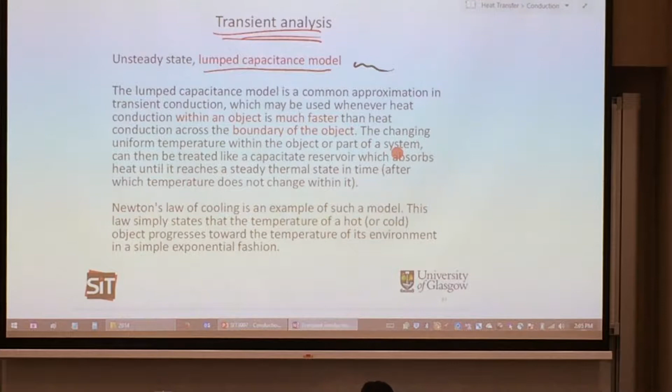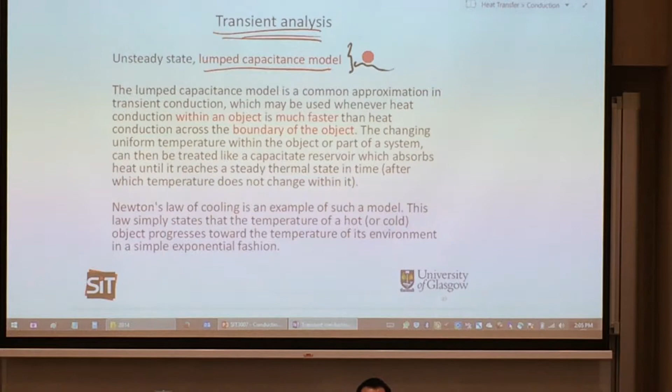So let's get started. We're interested to look at transient conduction because we're after this thing called the lumped capacitance model. So what you have heard so far seems to be a block of material with a temperature difference, and due to that temperature difference, heat will get transferred from one surface to the other surface. That's what you have been hearing.

And I extended that to the cylindrical form, and even for the cylindrical form, you have two surfaces of that pipe - the inner surface and the outer surface. Whenever there's a temperature difference between these two surfaces, heat will get transferred, and heat transfers from hot to cold side. But what I haven't mentioned is how much time it will take for that heat to get transferred over. It's almost assumed that as long as there's a temperature difference, heat gets transferred. But what about the time taken?

So this is why we call it transient conduction within an object. We're interested to look at the conduction that's within an object - say a very, very hot object. You drop that hot object, say a metallic steel ball, into quenching water - that is, cool water. Drop it into that and you hear it sizzle because it's so hot, 500 degrees Celsius, dropped into water.

That kind of sudden change in temperature requires time for stabilization. So there is this heat that's within that metallic ball at 500 degrees Celsius. It will take some time for it to cool down to achieve steady state between the hot ball and the water. So that time taken for it to cool down is, in electronic terms, a capacitance effect - it has a certain capacity.

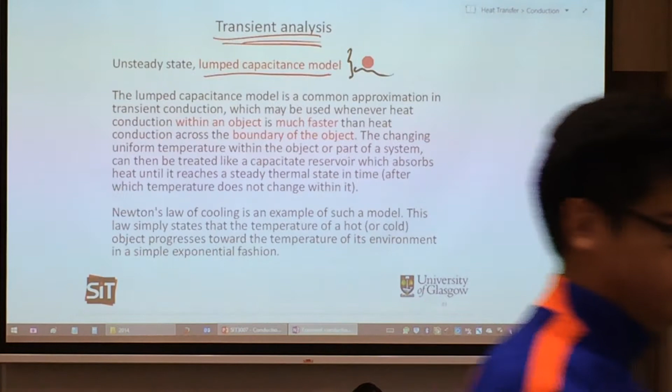If you're not familiar with electrical circuits, a capacitor is a device that, as you apply electrical supply, takes some time to charge up to the voltage before it's considered fully connected. So it will take some time for it to charge up. That time factor has that capacitance effect.

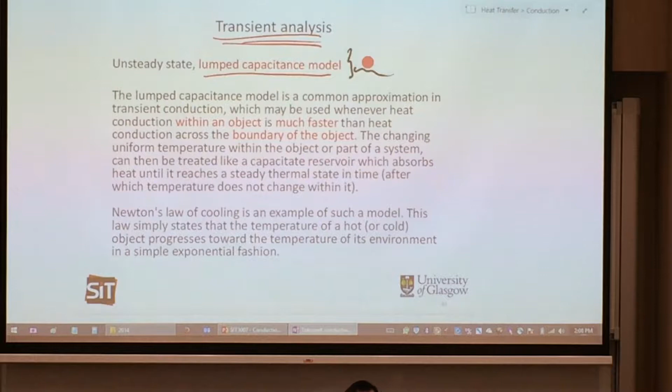So as we drop something into, let's say, a volume of water that has a very different temperature compared to that object, if there's a very huge temperature difference, it's very likely that you will experience a capacitance effect. But there's a better scientific way for us to figure that out. We don't just look at the temperature - we look at the material property, what is that convection heat transfer coefficient, which we label as H. Thermal conductivity we label as K, that is the material property of that solid.

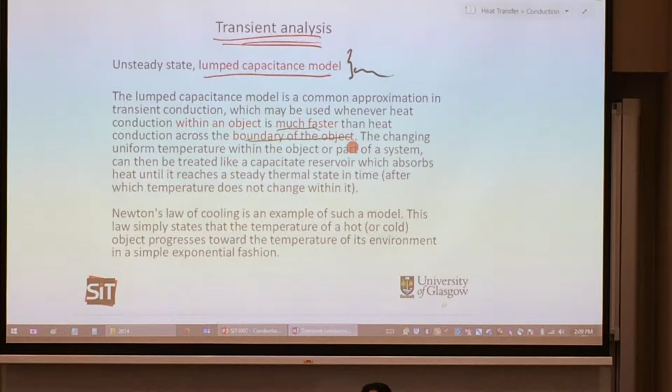If the conduction within the object is much faster than the heat conduction across the boundary of the object, that boundary going out into the water via convection, if there is this huge disparity, then it's very likely that you're dealing with a transient conduction effect, so across the boundary. Newton's cooling law is one example of that. We'll have a closer look.

We use a number called Biot number. The Biot number is a number that helps us decide whether we can use the lumped capacitance method or not. What is the lumped capacitance method? That will come in the subsequent slides. But for any of this sudden quenching in a cool environment, you would need to calculate the Biot number.

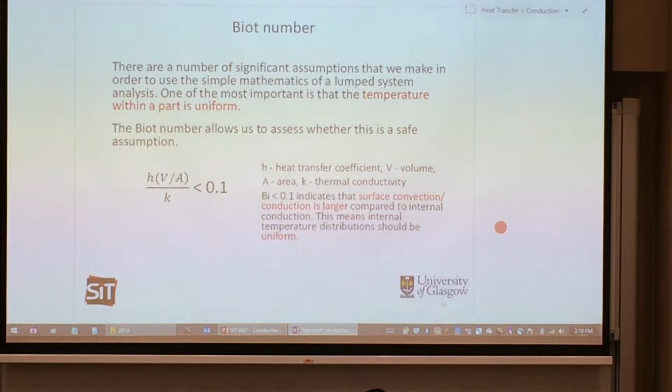So what is the Biot number? The Biot number is given by this formula, where H stands for the heat transfer coefficient for the convection side, V stands for the volume of that object, A stands for the surface area of your object, and K is the thermal conductivity of the object.

So if you arrange it in that way and do the calculations, and see that it is lesser than 0.1, that means you could use the lumped capacitance method. The lumped capacitance method will be used in the subsequent slides.

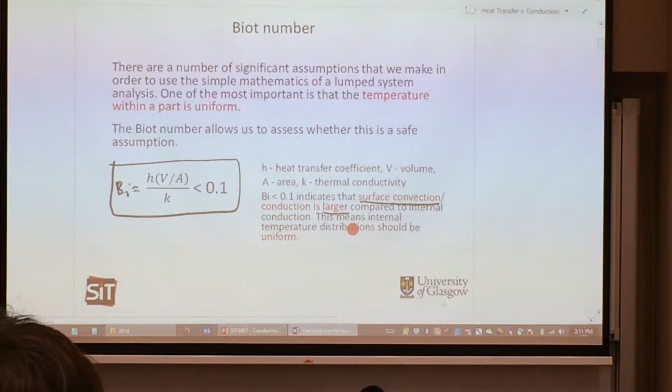But if this Biot number is less than 0.1, what that means is that the surface convection is actually larger than the internal conduction that's going on in the solid. Now, what does that mean?

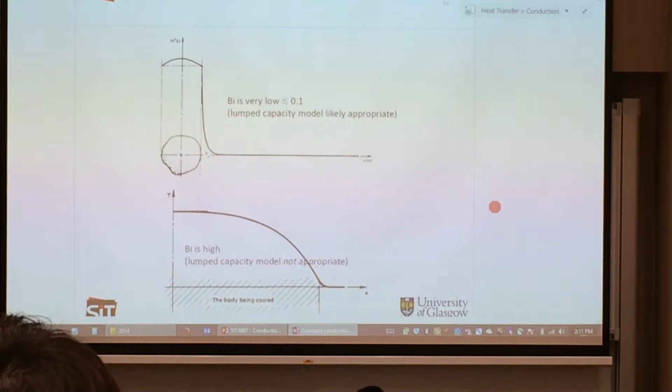This is an example of those two cases where Biot number is less than 1, and Biot number that is high, meaning a lot more larger than 1.

In the case of Biot number that's less than 1, look at this temperature scale: this axis is temperature, that axis is distance. I have a solid object placed into water that is at temperature T infinity. If you look at this temperature scale, T infinity is actually at this point, and this point is not 0 - it's a lot more lower on the temperature axis.

If you look at the solid temperature distribution within the solid, with this being the midpoint, you'll see that from the midpoint of the solid to the edges, the temperature difference is actually not too much. Compared to the temperature difference between the solid surface and T infinity, that temperature jump is a lot more larger. So a Biot number less than 0.1 has this characteristic: the temperature distribution within the solid is very small, but the temperature difference between the solid surface and T infinity is large.

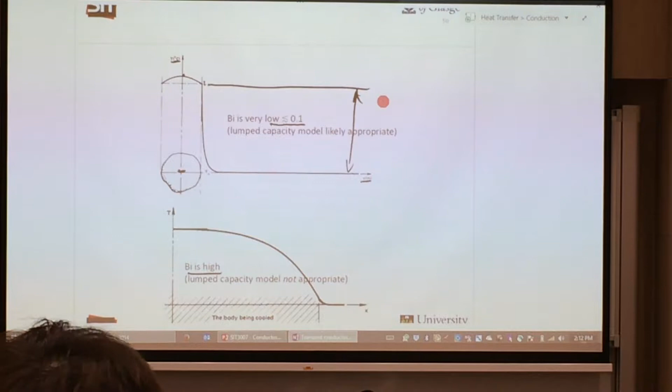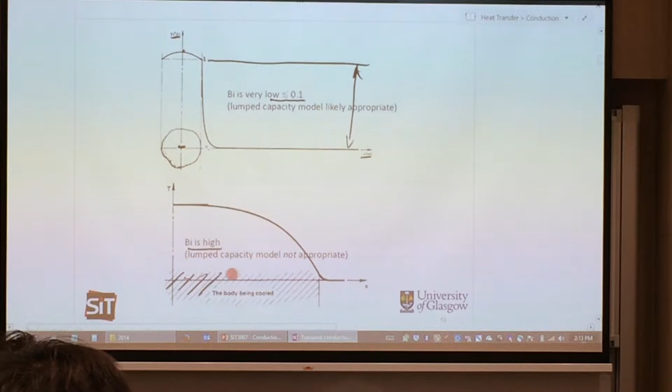Conversely, if I have a zoomed-in view of the internal part of this solid body, and I compare the temperature difference between the center of the solid and the edge of the solid, this temperature difference is now a lot more larger than the convection temperature difference, which is a lot more smaller. So in those cases, you'll find that the Biot number will be huge.

But then the question is, how huge is that? We know that if the Biot number is less than 0.1, then we can use the lumped capacitance method - that we'll look at later. But we didn't say how large the Biot number needs to be to count as large. Typically, you'll get into a region of about 5 and above.

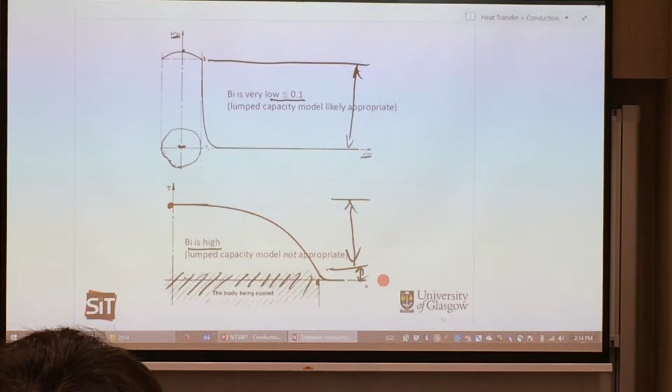How about 1? If I have a Biot number equal to 1, can I use the lumped capacitance method? The answer is that the larger the Biot number, starting from 0.1 and above, the lesser you could use the lumped capacitance method. So where is that point? The point is that it should be less than 0.1, and in fact, most of the questions you'll get, after calculating the number, will give a value less than 0.1, so you can conclude that you can use the lumped capacitance method.

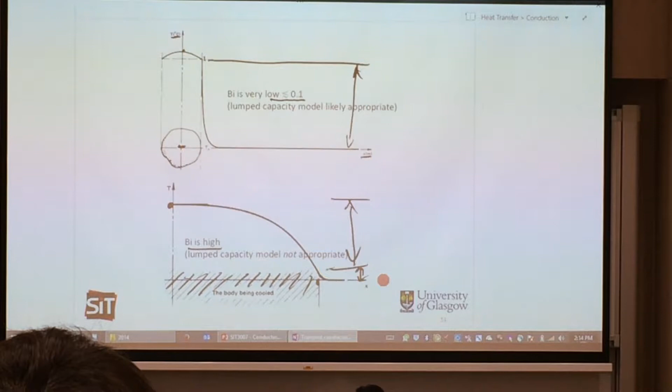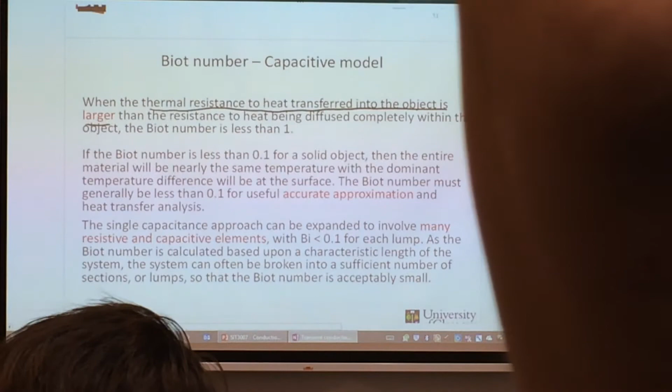So what you have seen just now is that the thermal resistance to heat transferred to the object is larger. If I were to sketch that out horizontally, you get delta T over the thermal resistance, say across a slab of a block, that's delta x over kA. Now the one in the denominator, that is your thermal resistance, R TH, thermal resistance.

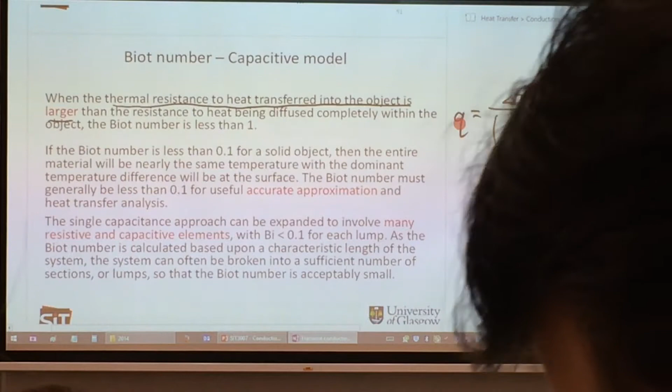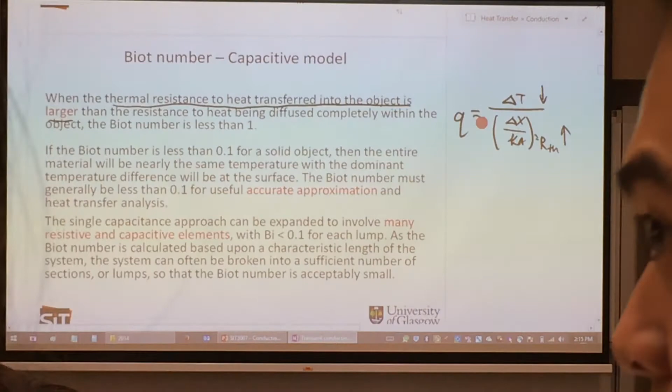Now if delta T is going to be decreased, that means we are looking at a case where within the solid, the temperature difference is going to be small. And if the temperature difference within the solid is small, it's very likely that Biot number is going to be less than.

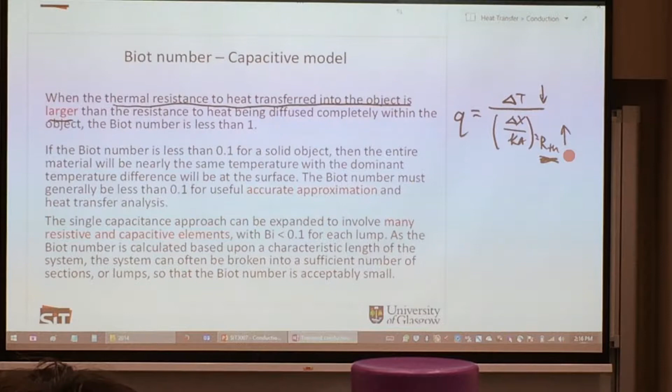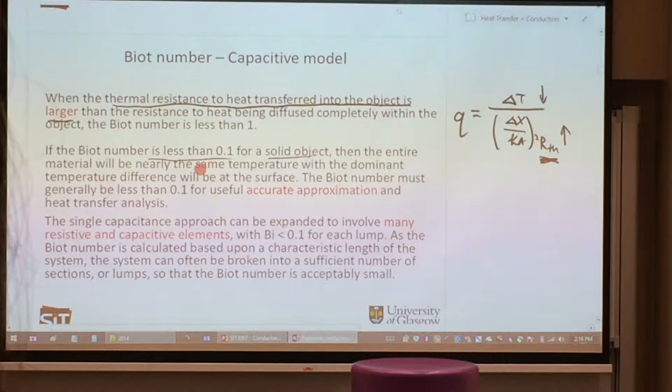So this thermal resistance also will play a role in deciding if you have a lower Biot number, that's less than 1. So this part says that Biot number has got to be less than 0.1 for a solid object. Then the entire material will be of roughly the same temperature internally.

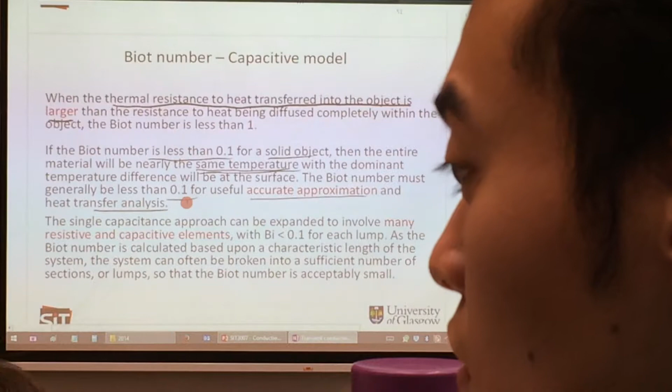And if Biot number is less than 0.1, then it's an accurate approximation for our analysis, where we'll be using the lumped capacity.

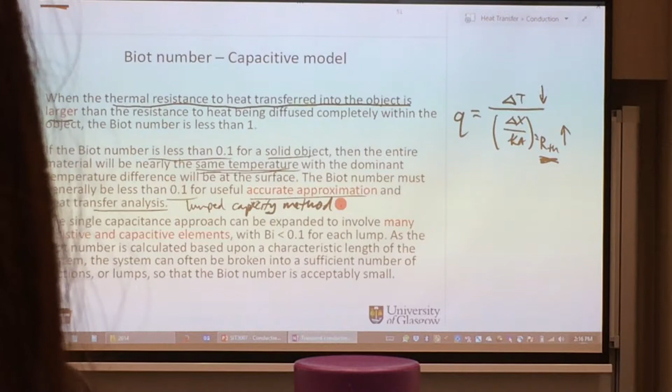So if you have various layers of material, you need to find out the individual lumped and the individual Biot number in order to decide that. So each of these individual layers, Biot number has got to be less than 0.1. So you can have a whole system of many resistive and capacitive elements cascaded together in a sequence.

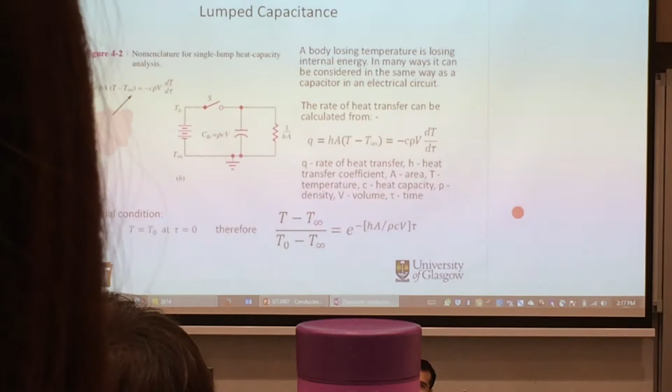Let's look at what is a lumped capacity. Electrically, the schematic form is sketched out in a model. I want you to be able to see two things: one is the solid side, and the other is the liquid side. The solid being the conduction side, and the liquid being the convection side.

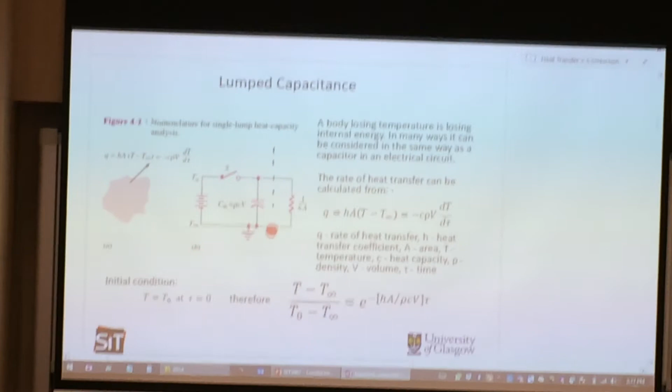Do you remember Newton's cooling law? Q equal to HA delta T. Right, that's Newton's cooling law. I can express this in terms of the thermal resistance for the convection part by taking that HA to the bottom. So 1 over HA is my thermal resistance for convection.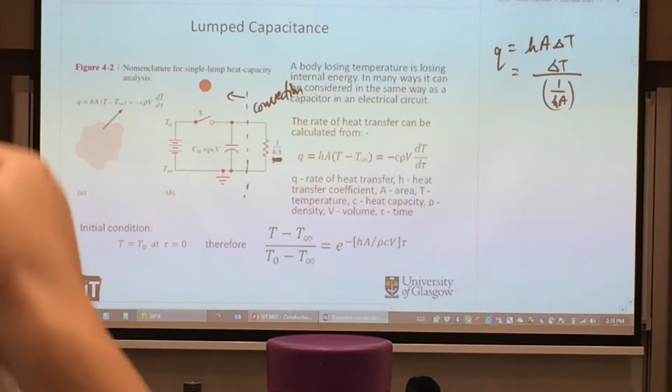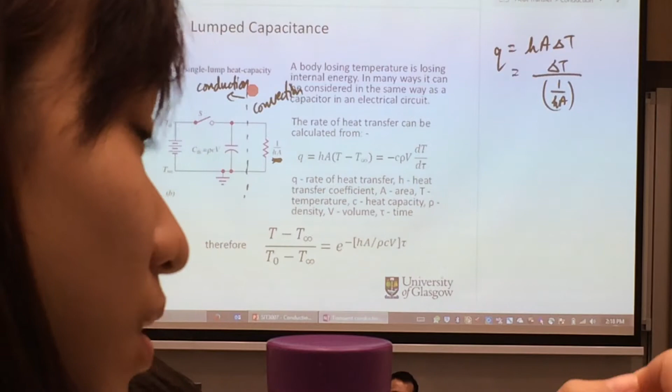So this part here is convection. And this part here is actually where our solid is, and that is where we experience conduction. But why is the conduction side a capacitor? It's a capacitor because I was talking about this object being placed in a fluid environment suddenly. So that's a quenching effect, that's a capacity effect. And because of that capacity effect, we have to bring in this lumped capacity model.

So the model is given by this equation over here. And what I'm going to do is slide over here to prove from this stage to that stage. I'm going to make use of this figure over here. And in this figure, I'm going to assume...

...that T naught is greater than T infinity. So T naught here would be the surface temperature of that solid, and T infinity would be the temperature of the water at infinity. So obviously the object we're talking about is very hot, so T naught is larger than T infinity. So we're going to start with that. I'm going to write out this equation over here.

Q equal to HA times T minus T infinity, equal to minus rho CV dt/d tau. And tau over here is actually time in terms of seconds. I know I could use the symbol T as well, but consistent with the textbook, we use the symbol tau to represent time. So I'm going to do something with this set of equations—I'm going to separate the variables.

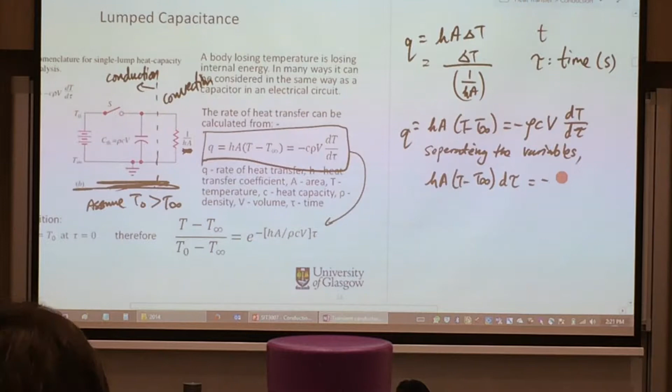So this is how I'm going to do it: HA, T minus T infinity, d tau. So I'm going to bring d tau over, minus rho CV d, T minus T infinity. If you're wondering, hey, this is supposed to be just dt as I could see over there, well actually these two terms, there's no difference.

Why is there no difference? Because T infinity is a constant - the temperature of the water toward infinity, and that's a constant number. If I differentiate T minus a constant, that's actually equal to T, because you differentiate term by term. If you differentiate a constant, you get 0. So if I differentiate this term, it would be dt, and differentiating the constant gives 0. So I'll get back dt as I could see over here. So these two terms are actually equivalent.

The next thing I want to do is bring this term over to the right hand side. I'm going to write everything on the left hand: dt minus T infinity divided by T minus T infinity, equal to everything else on the right hand side, which is minus HA over rho CV d tau.

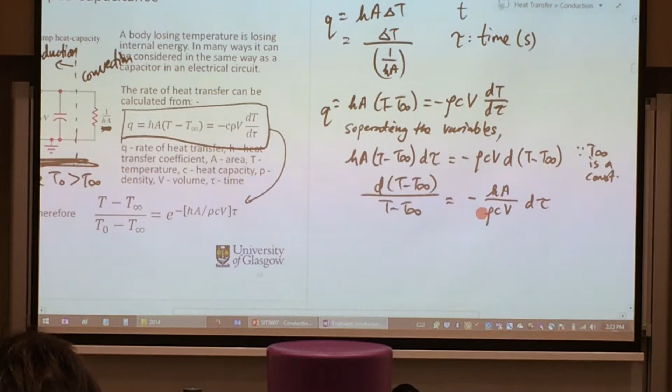So rho over here is the density of the object, C is the specific heat capacity that we heard from last lecture, and V is the volume of your object. Now by the way, those symbols are labeled over here, so we can see what all those symbols mean.

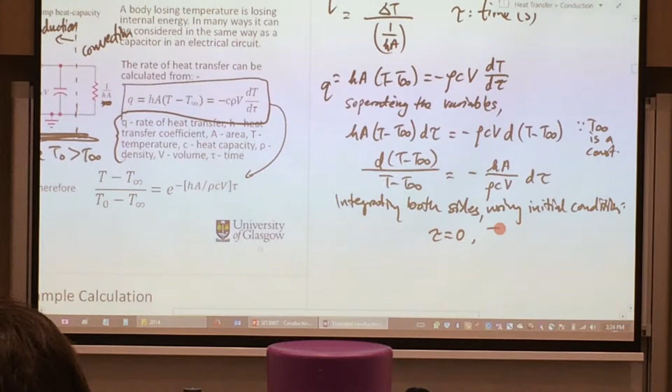So continuing, I want to integrate both sides using the following initial conditions. What are the following initial conditions? My initial condition is that when time is equal to 0 seconds, my temperature is equal to T0, that's the surface temperature. That's my initial condition. The other initial conditions that I have are kind of like a general condition.

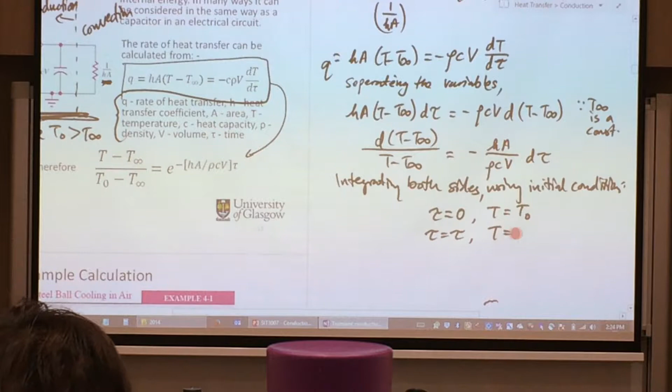Tau equal to tau, and T will be equal to T at time tau. So it's kind of like your temperature is dependent on time, sort of like the general equation. I'm going to make use of that, and then to integrate the left-hand side, I'm going to write it out in the following way.

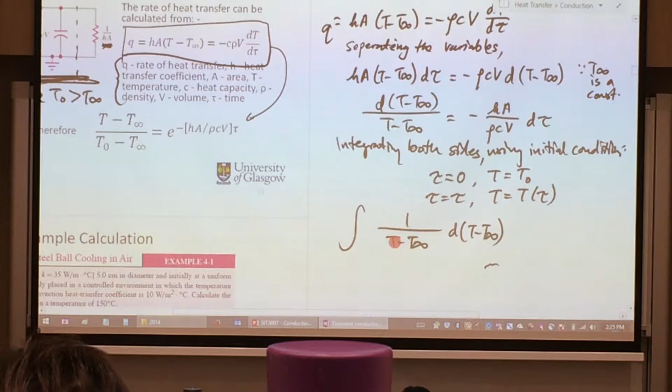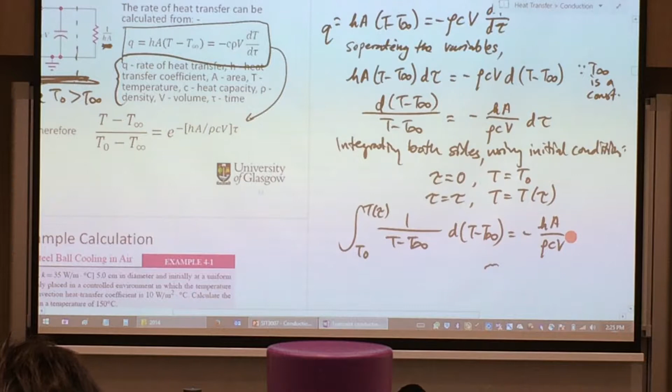And from the limits of T0 to T at any time tau, this will be equal to the right-hand side, minus HA over rho CV. The entire thing is a constant. Integrating d tau from 0 to tau.

Now the question is, how do I integrate this left-hand side? If I ask you, if I integrate 1 over x dx, what do you get? You get ln x. So this is kind of like 1 over x dx.

So what I'm going to get is ln, so-called x will be T minus T infinity, and you have the limits from T0 to T tau, equal to minus HA over rho CV.

How about integrating d tau? What do you get from there? If you integrate 1 dx, integrating 1 with respect to x, you get x. Integrating 1 d tau, you get tau. So tau from the limits of 0 to tau.

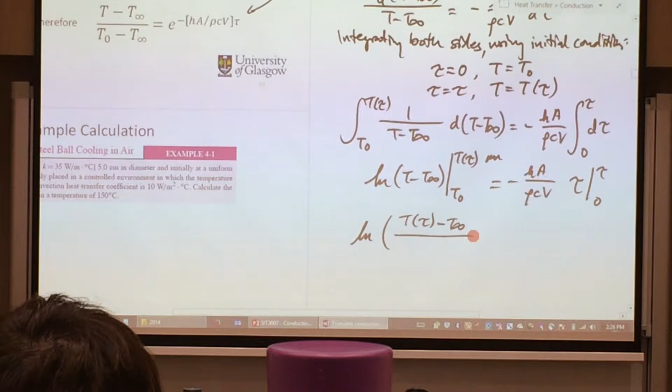So now I could substitute the limits into it. So ln here would be T tau minus T infinity divided by T0 minus T infinity.

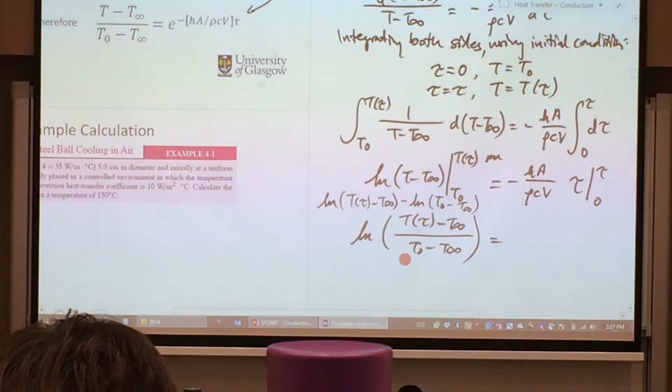Now how do I get this from substituting the limits? That's because if I substitute the limits, I get ln of T tau minus T infinity, minus ln of T0 minus T infinity. According to the law of logarithms, if I have ln minus ln, it's actually ln of this term divided by the next term - that's the logarithmic law. So that's how I got to that fraction.

Minus HA over rho CV, and this tau will be just a tau symbol. So now the next thing that I want is to express this term here in the bracket as the subject. If I were to do that, I'll be taking inverse ln on both sides, so I get e to the power minus HA over rho CV.

So that's a proof of it. And you could see that it is this equation here that you need to know. This equation is the equation for the lumped capacity model.

What is lumped capacity? You could see that it would have the capacitance. What is the capacitance? The capacitance is actually from your diagram. From your diagram, your capacitance is actually over here. That is rho CV, that is your capacitance of your system.

Why is that capacitance in your system? That's because your system is suddenly quenched in cool water, and you need some time for it to achieve steady state. That some time is defined as it has a certain capacity effect. That's why it's sketched out in that way.

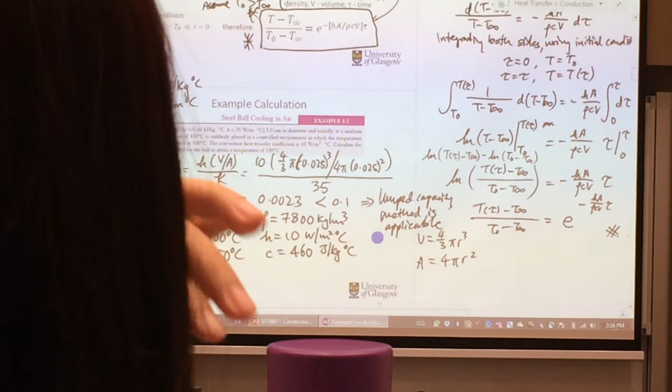So now let's plug it all into that equation at the top. But I just want to solve this part first, that's HA over rho CV, because that one has a lot of numbers in there. So I'm going to substitute it in.

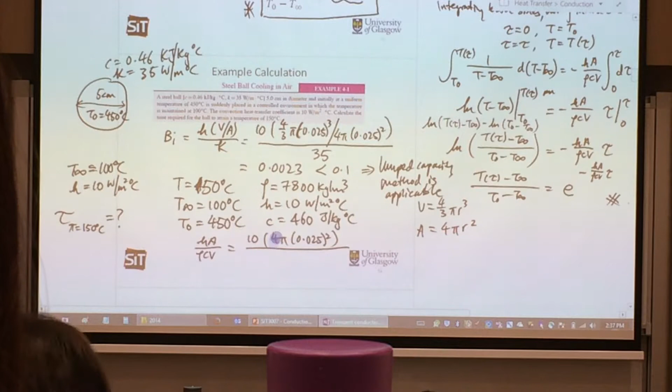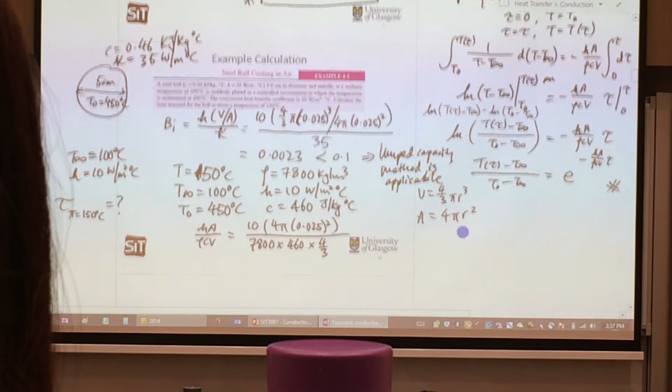That will be 10, and the surface area, that will be 4 pi r squared, divided by rho 7,800 specific capacity. And the volume, that will be 4/3 pi r cubed. If you just solve that one, you get 3.344 times 10 to the power minus 4 seconds to the power minus 1.

That's the unit for that. If you do the unit cancellation, you get that to seconds to the power minus 1. So now that I have that, I can put it in.

What I need is T minus T infinity over T naught minus T infinity equal to e to the power minus this term HA over rho CV, multiplied by tau.

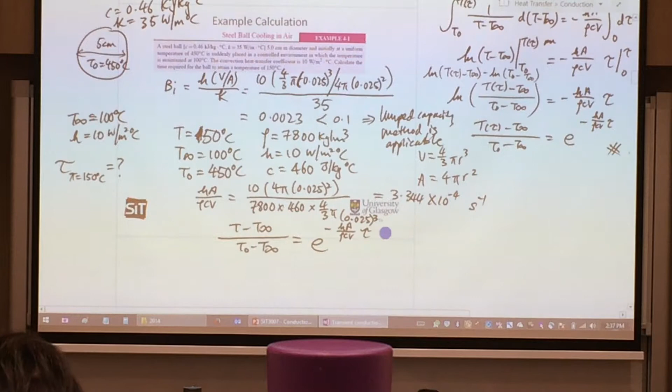So if I put everything in, that's a final temperature that I want to achieve, 150 degrees Celsius. T infinity, that's 100. T naught, 450. T infinity, 100. E to the power of minus 3.344 times 10 to the power of minus 4 and tau.

I hope you're able to find what is that unknown tau from this equation. If you couldn't, please come to me. You just need to take that ln on both sides. Eventually, you're going to get tau that's equal to 5819 seconds, or that's about 1.62 hours.

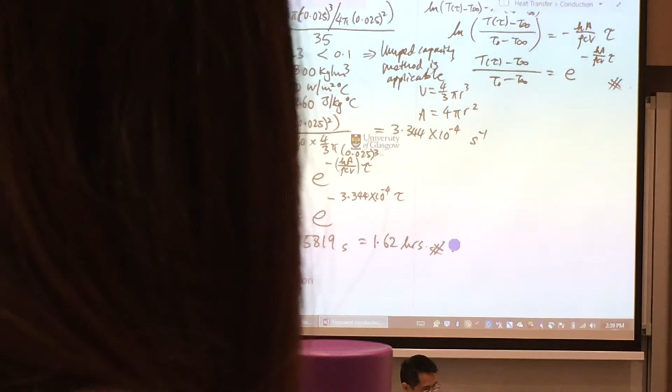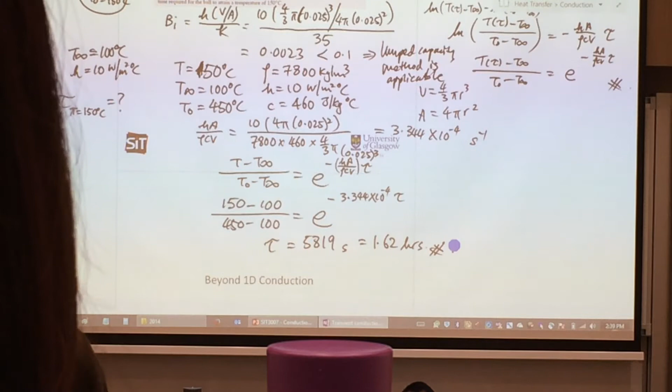So this is a part that was in an exam last year. Not sure if it will come up again this year. Last year there were a lot of this initial part of the lecture as part of the exam question.

Okay, let's go on to beyond 1D conduction. So far we heard about steady-state conduction, transient conduction, but all this conduction is only in one direction, that means 1D. So beyond 1D, let's look at the two-dimensional conduction structure.

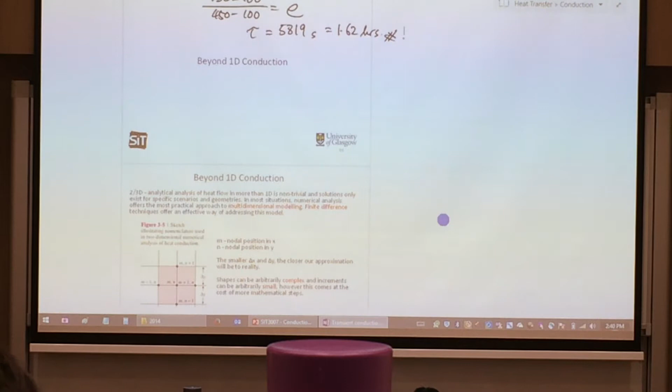So for two-dimensional conduction, if you haven't finished copying, you will come down later. I'll let you get access to this. I need to do a setup, and this setup requires this two-dimensional plate labeling.

So I'm going to label my two-dimensional plate in the following way. This point over here, this point, that, and that. These are actually called nodes. So you have one center node, and these four respective nodes that are surrounding it.

I'll call the center node with the coordinate MN. This is the coordinate MN. Right? So that coordinate MN.

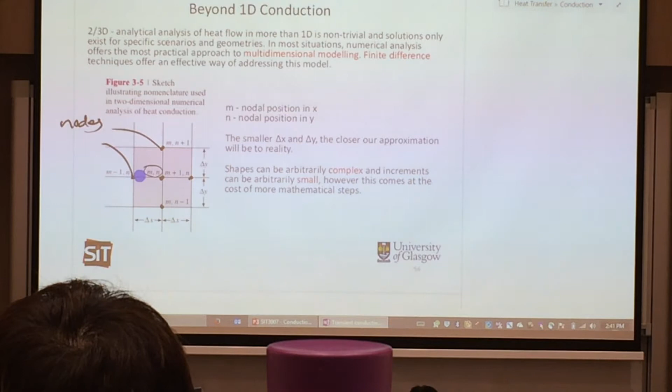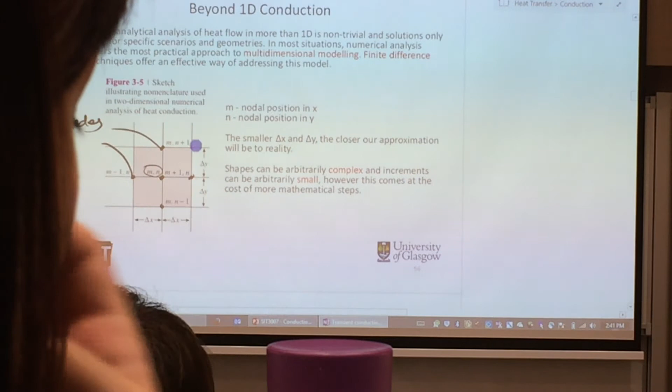The size of the grid in this y-axis, I call it delta y, that is the distance between here to here. Delta y, I'm assuming to be of a unit value, that is equal to 1. The same goes for my delta x on the x-axis, that resolution. I assume that it has a unit value that is equal to 1.

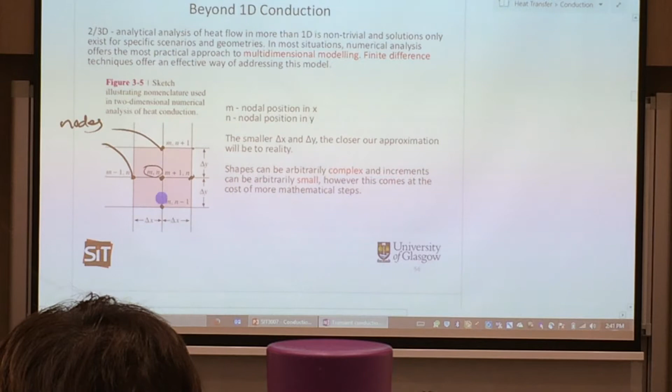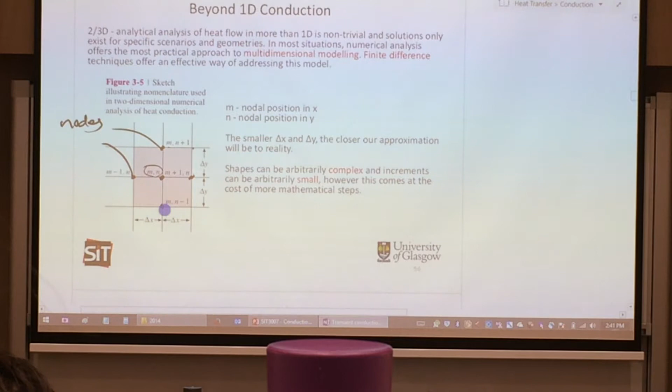So this node over here would share the same coordinate of m. So you can see that m stays. But the one that's above this will be n plus 1. And the one that's below it will be n minus 1.

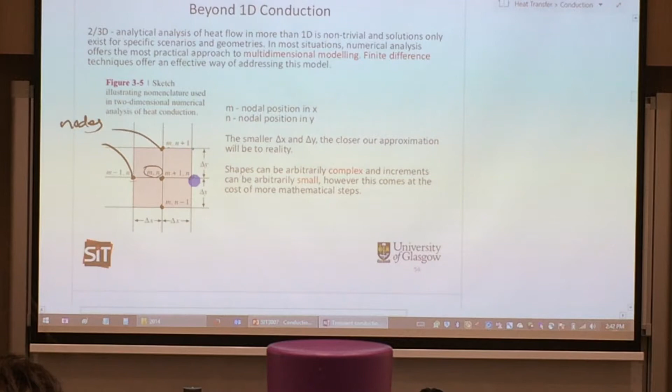So the same goes for these two nodes that are beside the center one. The one on the left-hand side, you get m minus 1, comma n. And the one on the right-hand side, that's m plus 1, comma n. So this is how I'm going to label my coordinates. Here's this 1, 2, 3, 4, 5 points.

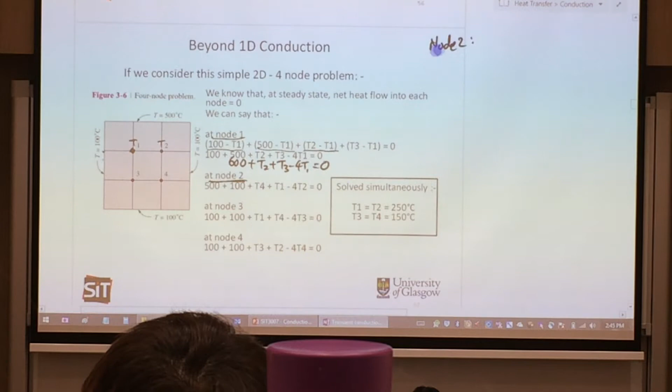That is for node 1. If I were to look at node 2 now, I'm going to write it out so it's easier to see. For node 2, I'll do the same thing: T1 minus T2. Add that to the next one, 500 minus T2. Plus the next one, 100 minus T2. And the next one, T4 minus T2. Equate the whole thing equal to 0.

Later on, I'll tell you why I am establishing this set of equations. If I simplify this, you get 500 plus 100, which is 600, plus T4 plus T1 minus 4T2 equal to 0.

Let's have a look at node 3 now. For node 3, we do the same thing. There will be 100 minus T3, plus T1 minus T3, plus T4 minus T3, plus this side here, 100 minus T3. Doing that simplification, you get 200 plus T1 plus T4 minus 4T3 equal to 0.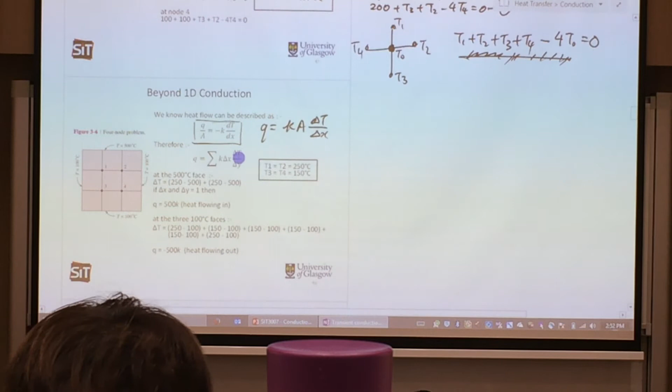That is Q equal to K A delta T over delta X, where X is actually the distance that heat is transferred across, that's the thickness of the object. So in our case, that X would be our y-axis, because we're considering that's the thickness along the y-axis where heat is transferring across, and then the x-axis, that's delta X, located over here.

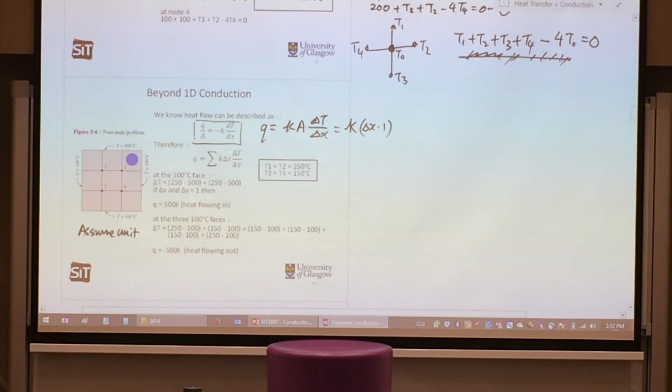So in this figure, we'll have it as K delta X multiplied by 1, because we assume that it has a unit depth. This figure over here has a unit depth, that's why I multiply by 1, so that the area will be delta X multiplied by the depth - that's the area where heat is transferring across.

And delta T over delta Y, where delta Y is this one, delta X, that is delta X.

So if I want to find out heat that's transferring across a certain surface, then I need to sum up all of that. This is a summation sign, given by this symbol over here, so I need to sum up all of that.

So again, I'm going to try to find out for that 500 degrees Celsius surface, what will be the delta T. We have these node 1, 2, 3, 4 temperatures ready, so I'm just going to write it down: this 250, this 250 degrees Celsius, node 3 that's 150 degrees Celsius, node 4 that's 150 degrees Celsius.

So the temperature difference across this part over here, that will be taking 250 degrees Celsius minus 500. So 250 minus 500, and then over at this surface, 250 minus 500. And we're going to assume that delta X and delta Y are all equal to 1.

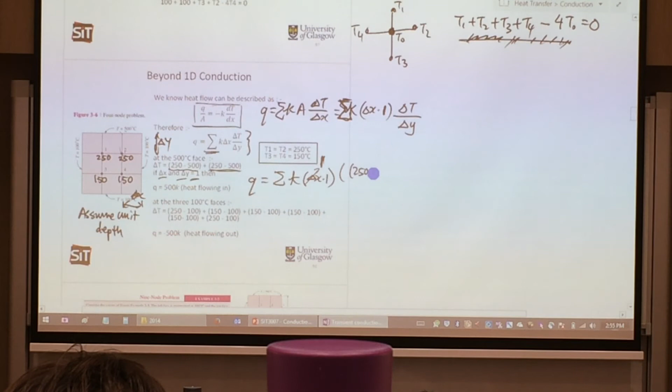So if I have that using this set of equations, I'm able to find out what is Q. So Q will be summing up K, A in our case is delta X multiplied by 1, and we know that delta X is actually equal to 1. And for your temperature difference, delta T, we have already found it out, is 250 minus 500 plus 250 minus 500, right, that was from here, delta T, divided by delta Y. Delta Y in our case, we assume it to be unit value as well.

So 250 minus 500 plus 250 minus 500, that will be minus 500. That's why your Q will be equal to minus 500. I mean, that minus - because your Fourier's law has got a minus, so it becomes plus 500K, because your Fourier's law has a minus over there.

So let's have a look at the other three 100 degrees Celsius faces. So this is one, this is one, that's one. So the same thing, I'm going to take the temperature difference along those three surfaces. For this side over here, that will be 250 minus 100, 150 minus 100, 150 minus 100 here, 150 minus 100 here, 150 minus 100, and 250 minus 100. That will be my delta T.